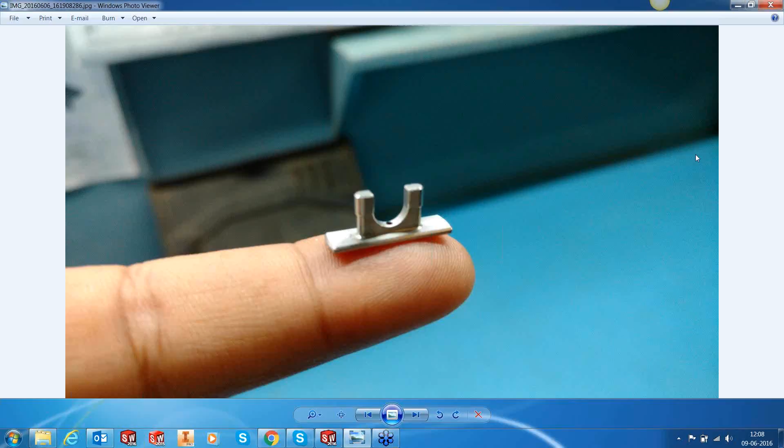This part, you can see it on my screen. It's held on my fingertip. Okay, and this is the size of the part. It was 20 by 10 by 12. It's a pretty small part. And the kind of tool life that they were expecting was more than what they're getting.

And after a couple of iterations, we learned a lot of lessons in this cutting, because it was new material for us. And the biggest lesson that we learned on this particular part was not to use turbo on Inconel material, especially 625, because although turbo used to give us nice cutting, our tool life used to dramatically go down. So we moved away from turbo.

And with our current strategies, mixing iMachining with HSM and a bit of 2.5D, we could push the tool life of the 10-diameter end mill from their existing 30 parts to about 60 parts. And the 4-diameter ball nose was doing very little for them, they were getting 200. In our case, the center slot was completely roughed out in iMachining using a 4 ball nose cutter. Again, a new lesson for me.

And what we achieved was about 400 plus parts on this, where the cycle time of the company was about 11.5 minutes, and we brought it down to about 5.5 minutes with iMachining, HSM, and 2.5D. But the majority of the role was played by iMachining in this case. And this is a big win for us in that territory, because it's already UG out there. We're very strong in this account.

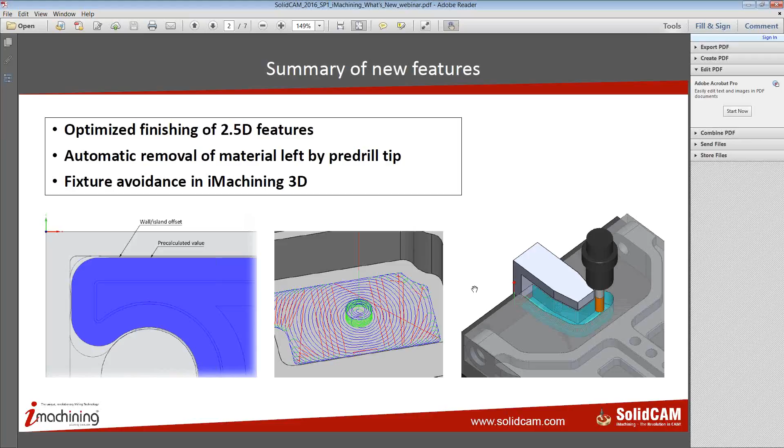Now, what you guys will notice right away as soon as you get into using iMachining 2.5D is we now have a new technology type called iRough and iFinish. And we've also updated our existing technology type of iFinish, which now also includes iRest if it needs to. Naturally, that's probably not clear right now, but once I get into showing this on the part, you'll understand better what we mean by that the iFinish also includes iRest.

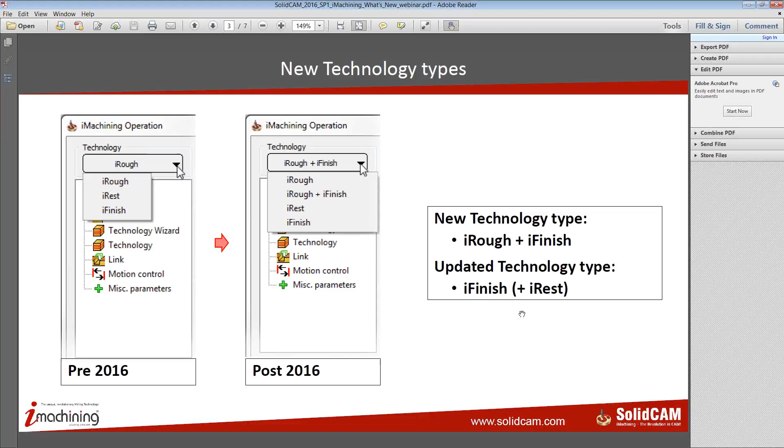To understand why we did all the finishing stuff for 2.5D, it helps to kind of understand the way people use the software today. And I think everybody here knows that usually customers and resellers were using some combination of iMachining, pocketing, and profile to optimally rough and finish 2D pockets. This can lead to many operations. This can also lead to the user having to track their parameters between the operations.

So with that said, I don't like doing too much in PowerPoint. Just wanted to set up a few ideas here. We're going to jump right into SolidCAM and SolidWorks. So the first thing I just want to mention real quick is the existing style we use today, because I think this sets the stage for what we're doing today and what I'm going to show you next. So if we have a pocket.

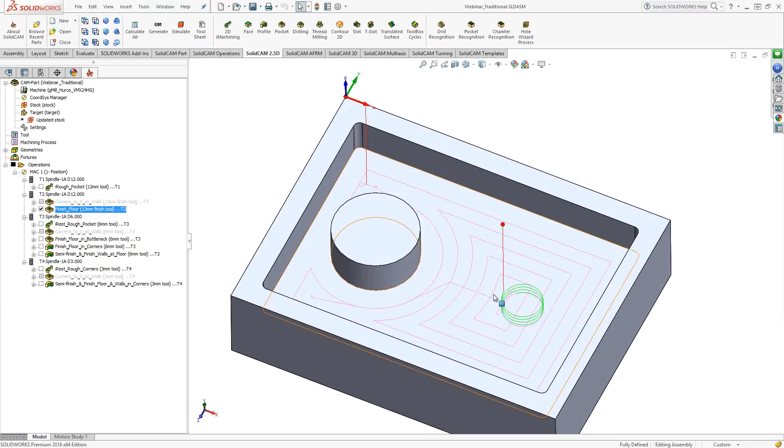Normally we're going to have some, as I said, combination of iMachining for roughing the pocket. We could finish with iMachining on the floor, or we could go to a pocketing style toolpath to finish the floor. And this is something we see a lot of people do, to get this more traditional looking finish on the part, as opposed to the iMachining spiral look that you get on the bottom of the part. Then you might have some rest machining to cut in between areas that the larger tool didn't finish.

You might have some finishing of the floors in those areas, or maybe you use a smaller tool to finish the floor for the entire thing. And this is always left up to the customer how he wants to do this and what tools he wants to use. You might end up finishing the corners. Some customers could use iFinish to finish the corners and to finish the walls. A customer could use something like pre-drilling to drill out the corners for finishing the wall. Or somebody might just end up doing lots of Z-level cutting in a profile operation to finish the wall.

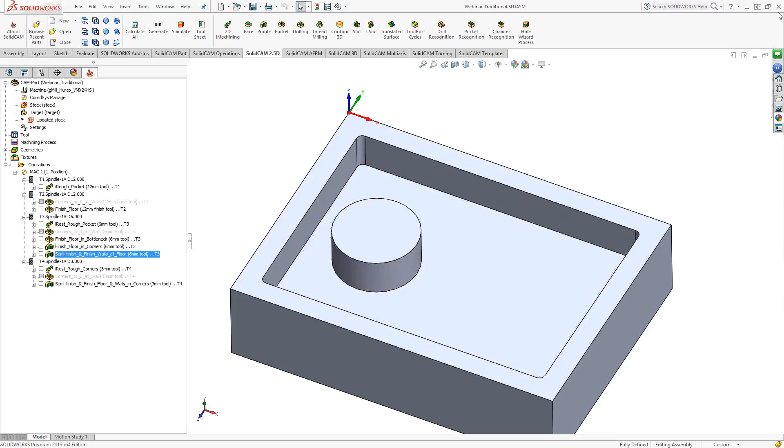So there is no right and wrong way for a customer to use these tools. SolidCAM is a toolbox. It's meant for them to figure out the right way. So in the end, the customer is trying to find the best optimization of operations, tool diameters, what tools he roughs with, what tools he finishes with, and he's always trying to make those decisions how he wants to cut the part using our multiple strategies. Now, I'll close this part, and let's get into actually seeing what we've done in iMachining.

So I have a part here. Basically what we got here is a 2.5D part. It's kind of modeled after an aerospace bracket. We have something we can cut around the outside. We have some semi-open pockets and faces, and we also have some closed pockets. So I'm going to go ahead and show how, with the new tools in 2016, you can use iMachining to do the roughing and the finishing of walls and floors, and how all that connection works.

So I have some previous operations in here. I'm going to leave them in there because I might unsuppress them at times just to show some things; we'll see how quickly things progress. So let's just say we want to start off with 2D iMachining, and naturally the first thing we want to do is cut the outside of the part. So we'll go to 2D iMachining. As I mentioned in the slide, we now have an iRough and iFinish in the technology type.

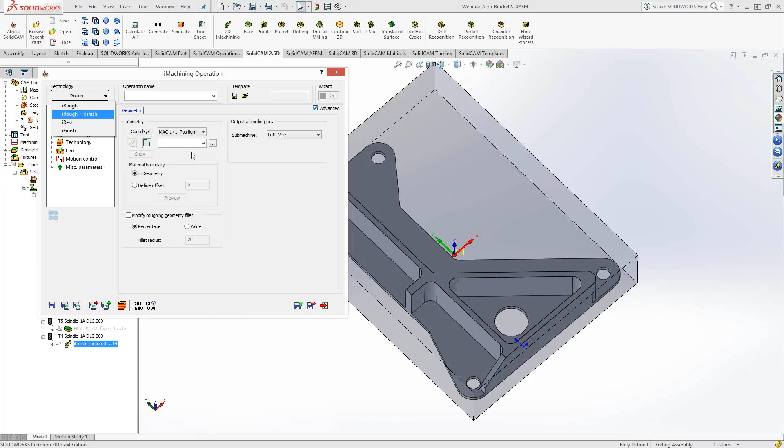And what I want to do is rough and finish the outside of the part. So with one tool, I want to be able to rough and finish the outside of the part, and then move on to my inside pockets. So what we'll do here is we'll define our geometry. So we pick the outside stock.

I apologize, didn't want to do that. Let me pick the bottom. So we have our 2 chains. We want to mark the first chain as open.

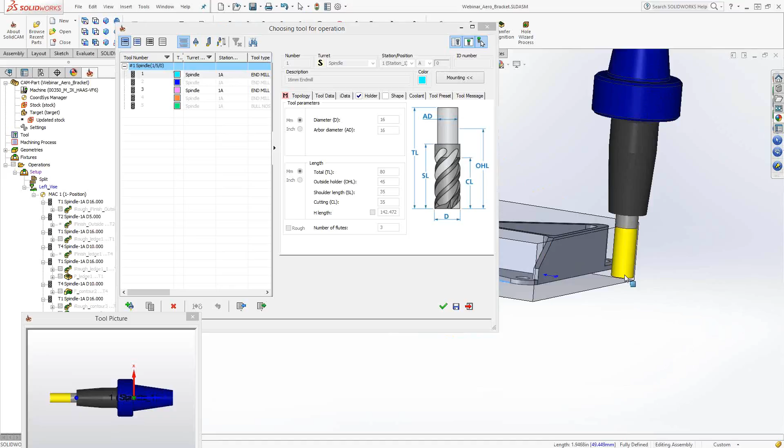Now we want to go grab our end mill. So what I'm going to use is a 16mm end mill. This tool is big enough to get all the way down through the part, but it is not going to be big enough to finish a couple of the small corners we have in there. But still, we want this big tool to finish as much of the outside as possible, and we only want to use a small tool just to finish the corners.

So we'll select this end mill. We'll select our levels. So we want to machine from the top. We want to machine down to the bottom. Let's say we want to go down 0.5 millimeter extra.

And now, if you look, there's not too many dialog changes that you're going to notice here, which is actually really cool. The software doesn't add too much in the UI, but there's a lot of stuff going on in the background. So we have our standard wall and floor offset. In this case, I'm not going to finish the floor because we're cutting the outside of the part.

Now, even though we're cutting the outside of the part, it's always possible maybe that's like a fixture, and when you flip the part over, you're going to locate on it. So maybe sometimes you finish the floor if you like. But we're just going to go to 0 on the floor offset because we don't have to worry about finishing the floor. We also now have a semi-finish. There's no point in having the semi-finish.

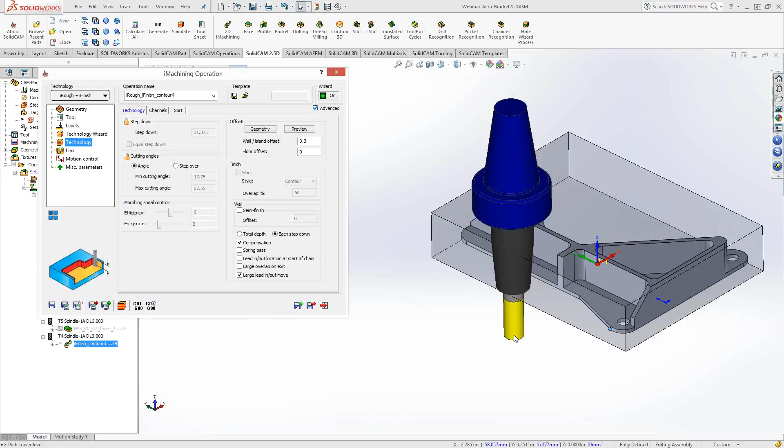And I'll pick compensation, and I'll pick a large lead-in, lead-out move, just so when we look at the toolpath, you'll be able to see where the final wall passes. And we'll just save and calculate this operation.

So here we can see we have the iMachining toolpath. It roughed out. And with our large lead-in and lead-out, you can see we also get the finishing toolpath around the wall. So if we actually simulate this, now that we've actually cut the stock, there's no point to see that anymore in SolidWorks, so it'll make the simulation a little nicer. Turn on the holder.

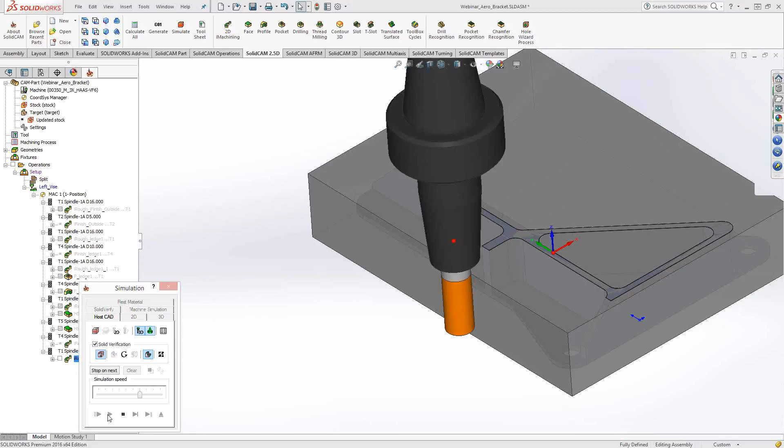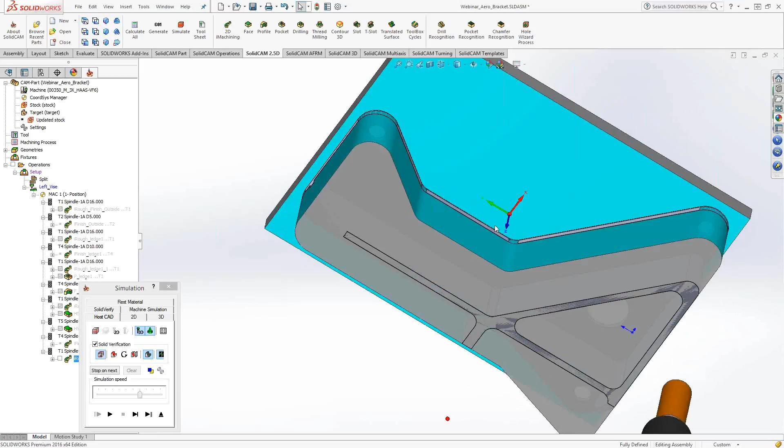So we get the iMachining roughing. It roughs to the wall offset. We get our typical iFinish where it cleans out the corners first, and then it does our final finish pass along the wall. And what we have right now is some material left over in just these 3 corners. But we've already finished the majority of the wall with this large tool.

For anybody who used iFinish in 2015 and previous, you would know that you could do iFinish. It was an existing technology type, and you could finish the wall with iMachining. One thing you could not do is finish the wall with one tool and then go and do rest finishing in the corners with a smaller tool. So now we've eliminated that limitation: we allow and calculate rest material for iFinish, so you can come in with a smaller tool, which is what I'm going to do here.

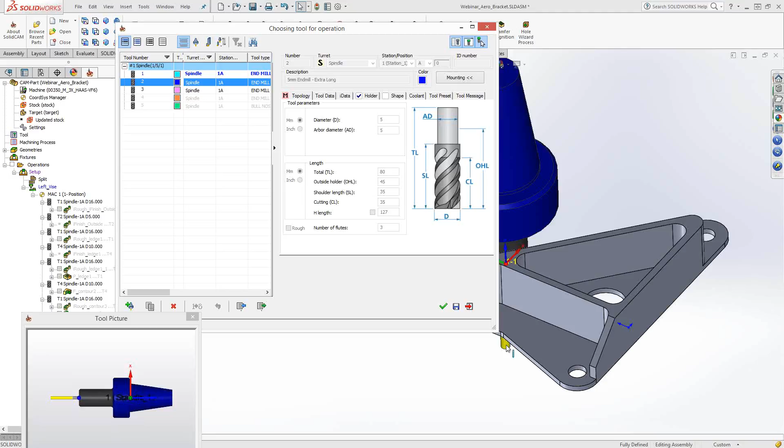So I'm just going to do a save and copy. I'm going to go select my smaller tool. So here we have our 5mm tool. The 5mm tool is long enough to get all the way down there. We will select that. Now what you'll notice is the technology type also auto switched to iFinish. That's because the operation it's linked against was iRough plus iFinish, so the only thing you can do now is iFinish again.

So we've also added some little UI things that auto select stuff to make the software a bit more intuitive and make things a little quicker to program. So here, with a small tool, a semi-finish can really be a nice thing. With semi-finish, we'll also get an extra toolpath, because we're going from 150 microns, then we can take a second pass at 80.

So if we calculate and simulate this, now you can see we have just iFinish toolpath in just those areas. And we'll quickly simulate this.

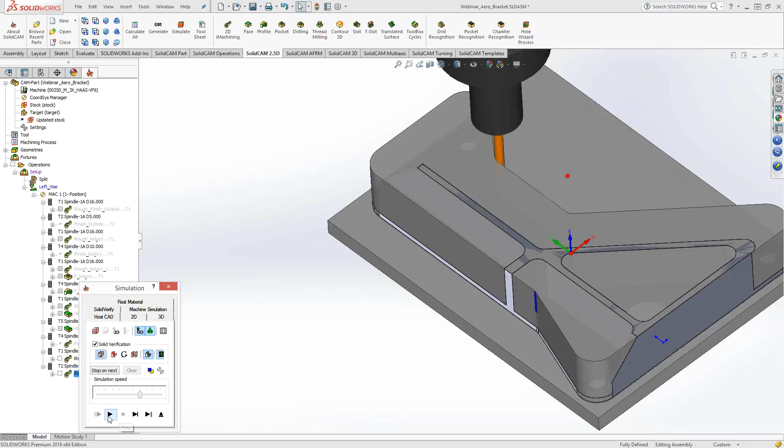This outside is pretty simple. When we get into the semi-open pocket, I'm going to go over more of each part of the toolpath that we're doing with the roughing and everything. So we'll finish this. So now we have our corner finished, and this is, as I said, a new feature now in 2016 that you can now finish after an existing tool with a smaller tool.

And what you've also noticed is that with the iRough, you can now do roughing and finishing in the same operation. So in the previous version, you would have to do iRough and then iFinish, but now we've combined those two tools into one technology type.

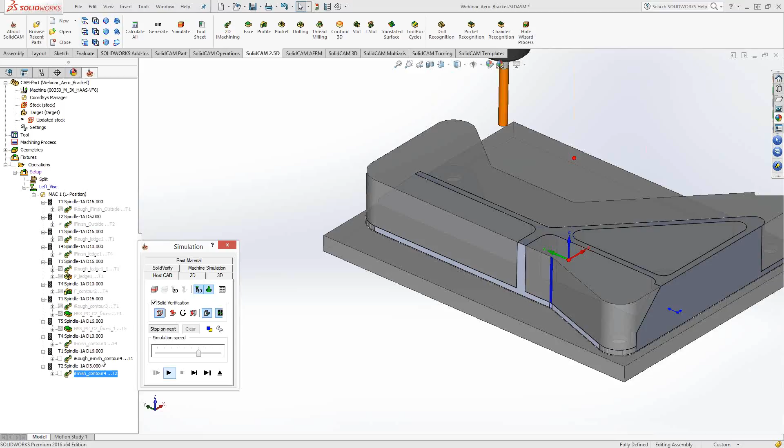Okay, so now let's do some of the more exciting things and actually see all the floor finishing and how that works. So we're going to add a new 2D iMachining. We are going to define our geometry. So there's our pocket. As we know, we need to mark our open edges. So we're going to do our from-to, so that way we get from this ledge to that edge, and we mark that as open. And I'll just call this ledge 1. I don't think I have that geometry named. Nope, of course I already had the same name.

Now what I do want to do is I'm going to do iRough and iFinish on this. So we're going to pick iRough plus iFinish. We are going to select our first 16mm tool. Oh, I apologize. We wanted to do iRough. So we're going to do iRough. We want to select our pocket depths. Okay, now when we do iRough, we are now going to finish the floor with a pocketing style toolpath.

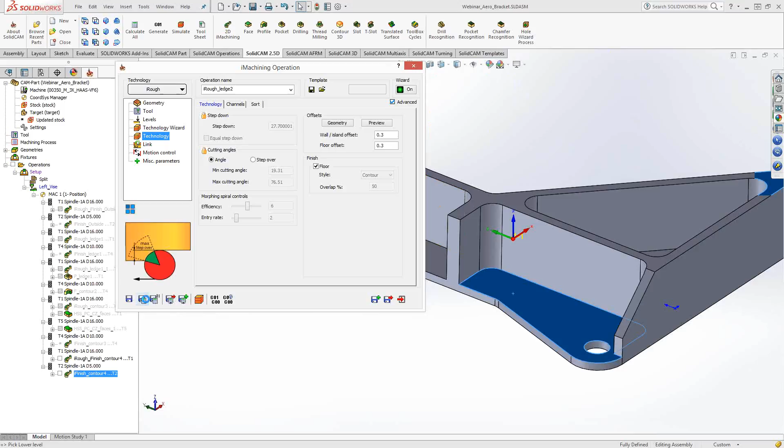So let's simulate this operation and see what we get. I'm going to rotate this to more of an isometric from this side. So we are going to get the iRough, and I'm simulating this slow so we can properly see what's going on. So we get the iRough. The iRough is staying away from the wall by the wall offset amount. Then once the iRough is done, we are now going to finish the floor with this tool. So now you can see we automatically get the tool leading out in air. And I will just single step this. And now we get the finishing of the floor.

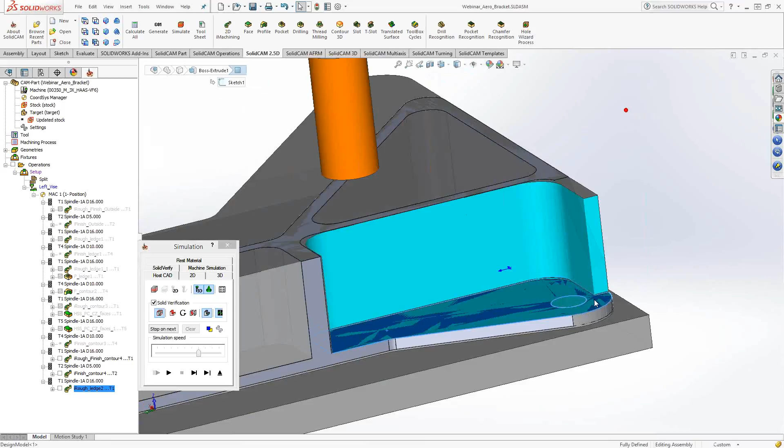Now I want to show some little features of what we're doing. If we zoom in here on this corner, since we are now tracking what is being roughed and what is being finished from iMachining, we can make some smart decisions about how to lead in and lead out in the air, and also to keep the tool from hitting existing material. So what you see here is, this little ledge is showing that when we finish the floor, we know the wall's not finished, we know the wall's roughed. So we stay away from the wall a little bit, so that way the tool is not actually hitting material along the entire flute.

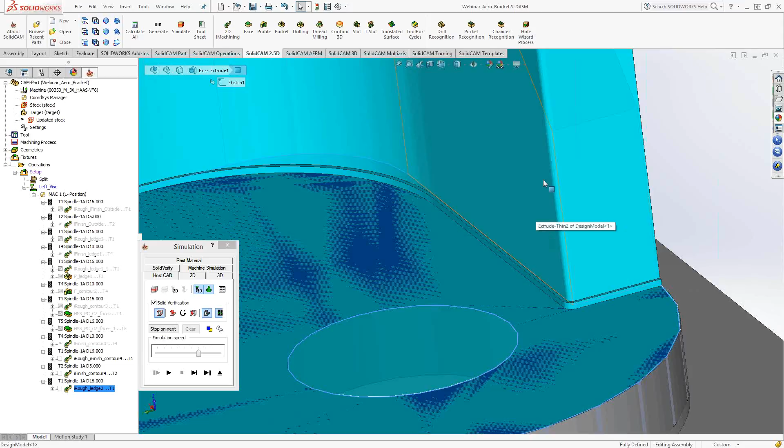So as we know from finishing, the best way to get the best finish is to keep the load as low as possible. So the last thing we want is, we don't want the tool to get excess loaded, like going into a corner or rubbing against the wall, because the tool ends up flexing a little bit, and when it flexes, the tool digs into the floor.

And I can tell you that we've done a lot of test cutting with all this finishing stuff, and a lot of these little things we did was a result of, one, what we knew from being machinists, and two, what we saw from test cutting. So I mean, we cut steels, we cut titaniums, we cut aluminum, we did many different size tools. So a lot of these little things we did is from our test cutting and trying to prove out what was the best way to do these things.

So we see now, we got an iRough, and we can finish the floor with a pocket style. You can still finish the floor with an iMachining style if you like. So let's save and copy this operation. And now we're going to do iFinish. So we're going to switch to iFinish. We will switch to our secondary tool. So our secondary tool we have is a 10mm end mill.

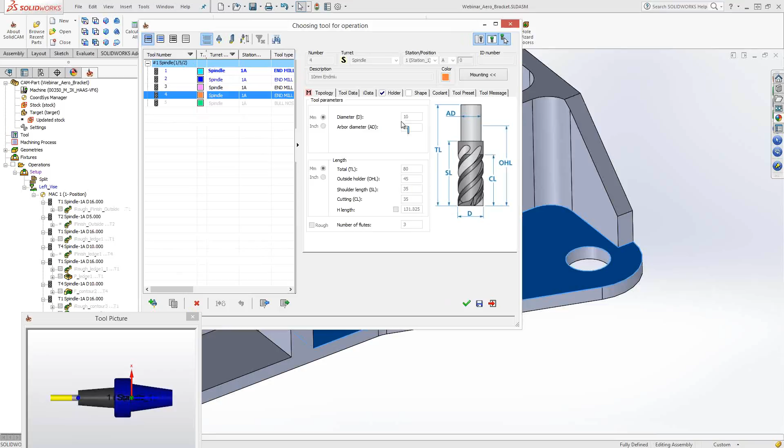So this end mill is a little bit smaller, but it's able to finish the corners. So we will select that. Levels, everything stays the same. The operation is linked to the previous one. This is a pretty big tool, so we don't need our semi-finish. We will do compensation and our large lead in/out move, so we can see that again. And we'll calculate this toolpath.

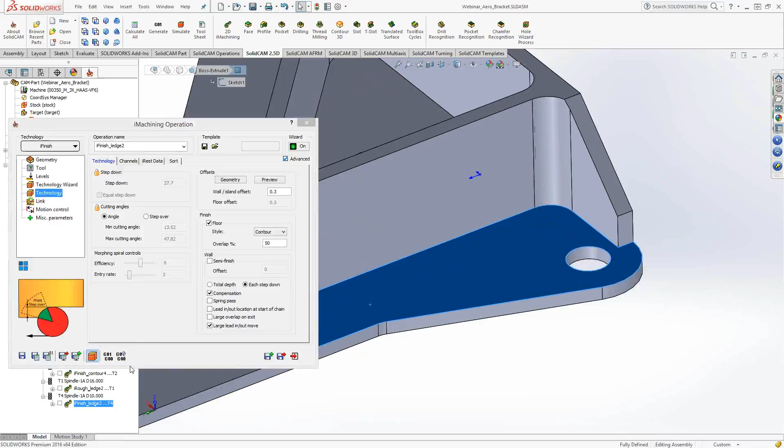So let's actually go into the simulation and see what's going on now, because now this operation knows that the previous operation did roughing, it knows the previous operation finished the floor, and it knows the wall offsets, the floor offsets, it knows everything that the previous operation did. So what we're going to see now is a very optimized tool path that keeps the tool from plunging on material and being very optimized.

So what we're going to get is our traditional cleaning out of the corners. So I'm trying to single step this stuff so it comes through nicely in the webinar. So if I zoom in on this area, you can see there was a lot of material left over from the large geometry fillet and from the iRough. So the corner is now brought in to the constant wall offset.

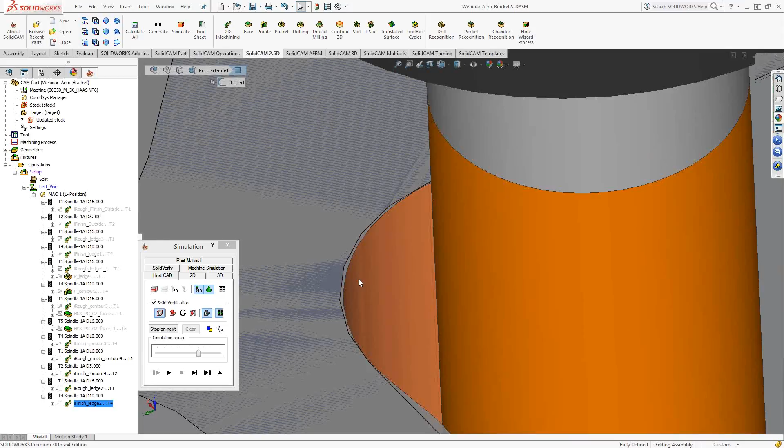Then we get our iFinish preparation, which is where the tool goes all the way. It basically finishes to the floor, to the wall, but it stays away just a little bit. And for anybody who's used iFinish, this is how iFinish always worked. We always had those little corner tool paths where any area where the tool would over engage on the finish wall pass, we clean those areas out basically to almost a zero wall offset, so that way the tool doesn't over engage. So we get this in both corners.

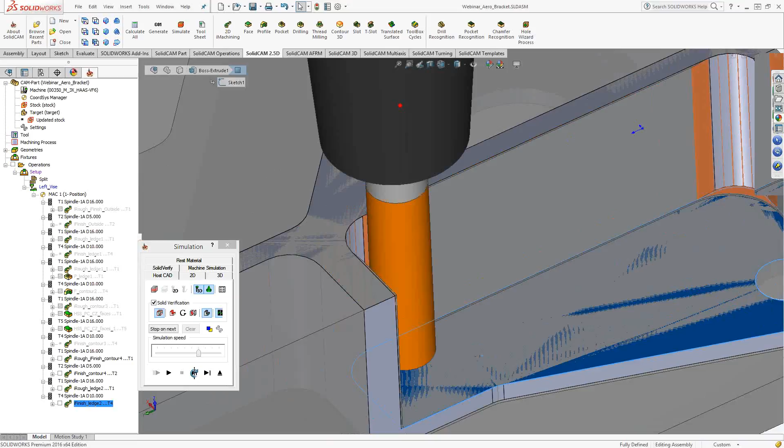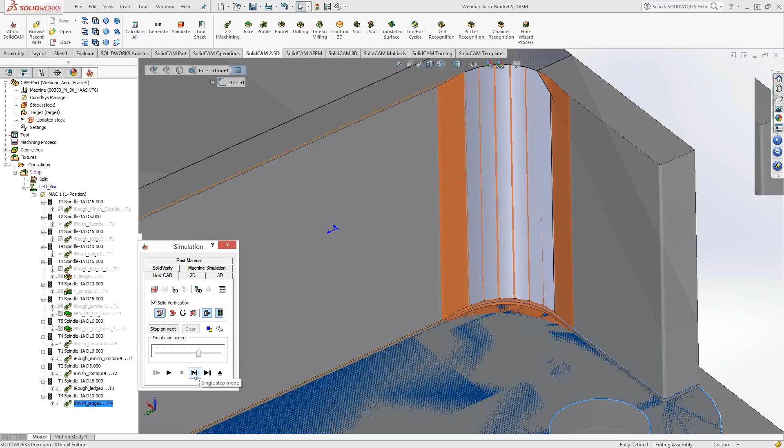And now what we are going to get, and we'll let the first one play because this should be doing the floor. And what I'll do is I'll actually turn off the tool for a moment, and we'll zoom in. So you'll see the orange cutting here down at the bottom. So here's what the tool's cutting. So we have the corner basically finished, and we have it prepped. Now we need to clean out the floor excess material. So you get now the floor brought in, and let me turn the tool back on.

You are going to get now the tool also going all the way to 0. So the wall gets cleaned all the way to 0. Then we get our final finish pass along the wall.

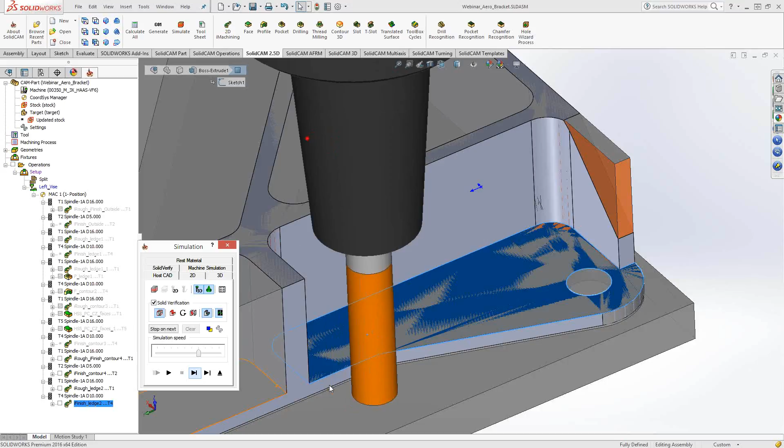Now, what we've seen is that you can now iRough. You can finish the floor with an iMachining style toolpath or a pocket style toolpath. When you do save and copy and you make a link, the iFinish knows if the floor was finished, if the wall was finished, and now we're correctly adding all the little toolpaths we need to make sure that the finishing can be done in one Z step. That's always the big thing with iMachining finishing from iFinish, we want to do one Z step. So we need to prep the corners, we need to clean out the rest material, and we also need to finish the floor.

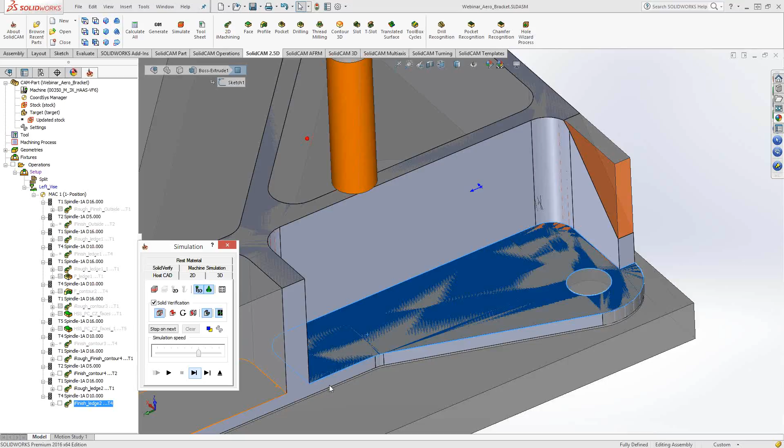As we mentioned before, one of the main things to make sure that we handle properly is that when the tool is cutting the wall and finishing, it's only touching the wall. And when it's finishing the floor, it's only touching the floor. We don't want to end up in a condition in iMachining where we want to be finishing the wall and it's cutting excess material on the bottom from the floor offset, and therefore adding some extra load and possibly digging in on the floor. So these are all little things we're doing in the background to make sure you get the perfect tool path.

Now let's look at how we would program that ledge using our existing tools. So I'm just going to suppress these two operations, and let's say we can take the iRough, because the way everybody would work today, we would use an iRough. But let's say we wouldn't finish the floor with the iMachining. So we would just do an iRoughing toolpath. This would clean all the material away, leaving our 0.3 on the floor and our 0.3 on the wall.

Then we would go to something like a pocketing operation. So let's go into pocketing. We would try and share geometry because we can. So this is our ledge 2. We will go select the same tool. So we'll go use that same end mill that we were using.

Now, since we've already roughed the entire pocket, when we finish the floor, we don't want to start from the very top and go all the way down. So what we're going to do is set our upper level and our pocket depth to basically the bottom. And we're going to tell SolidCAM that we have the 0.3 worth of material on the floor, because that's actually where the material is stopping.

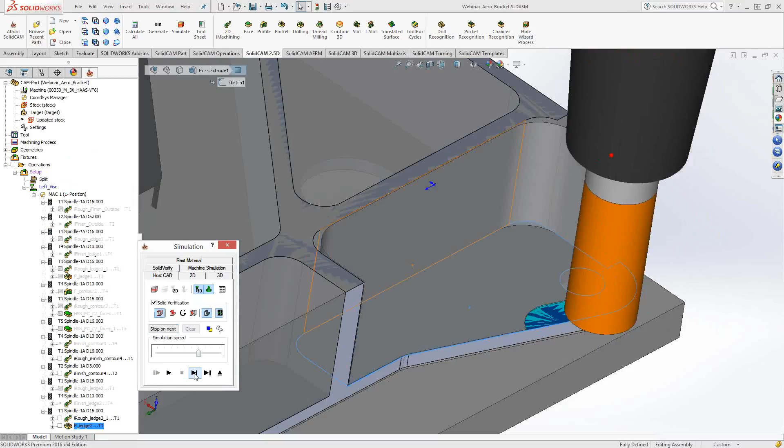So let's simulate this. As you can see, the pocketing toolpath is going to be basically what we saw in the iMachining. Okay. We finished the floor, but we noticed something. The tool touched material in the corner. So one thing we get in mixed operations is that iMachining uses things like geometry fillet, and the geometry is cut with a bigger corner fillet, so that way the tool cuts really nice with roughing. So when we go to pocketing, we have more material left over in the corner.

Well, naturally, we probably don't want the tool to hit in the corner. So now the user has to use some combination of his understanding of wall offsets and going further to stay away from the wall. And he's going to maybe put in here, I don't know, let's try like 0.75. Because the idea is that when we finish the floor, the last thing we want to have happen is for the tool to hit a bunch of material in the corner. Okay, it looks better, but you still need to go a little more.

Okay, so now we're going to get a nice tool path. It's going to stay away. And as I showed also with the iMachining toolpath, we get this ledge that's left over because, as we said, we don't want the tool touching the wall. And you can see how on the straight parts of the wall we have a different amount of material than on the floor, and on the corner.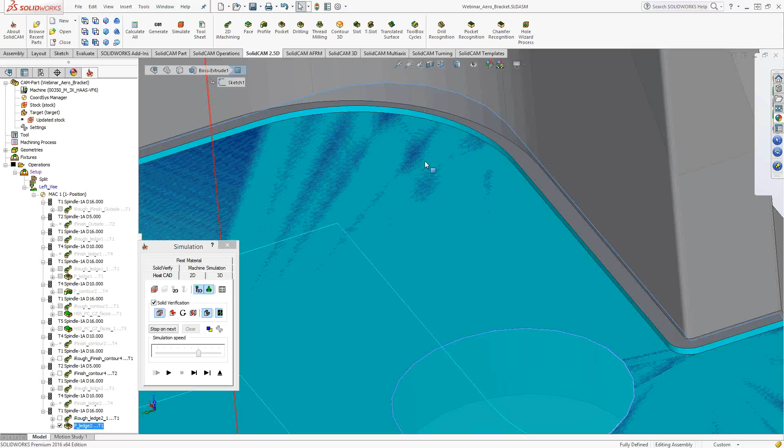Now, this toolpath is fine. This toolpath here is no less optimized than what we have in iMachining in 2016. The only difference here is we are taking care of all the offsets and everything automatically because the iMachining toolpath knows what was cut. It knows all the geometry and it's shared. So this is no shorter or longer of a toolpath. It's easier for the customer to use. It's easier to get an optimized toolpath, and you don't have to play around with some of the settings and remembering stuff.

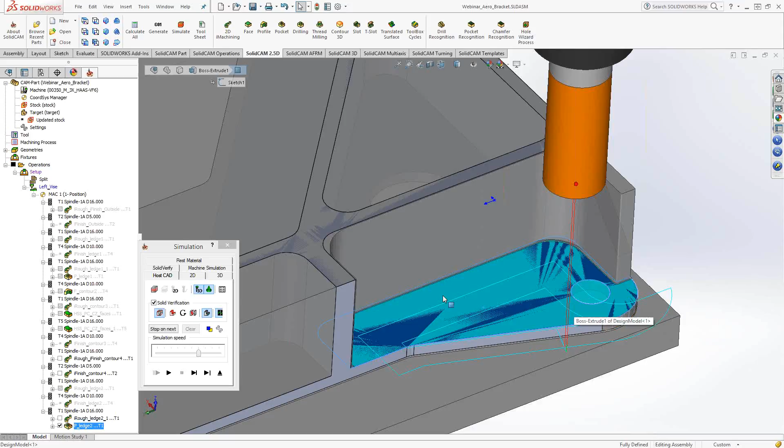And then, of course, probably from here, we could throw in a profiling operation if that's what we actually wanted to do. I think most people would probably use iFinish, but that's up to each person. But if we did a profile operation, let's go down to our 10mm tool. Levels. So once again, we need to pick our levels from this operation to this operation. We are going to finish. Let's say we want to do equal step downs, and we can finish with 4mm steps, and we can turn on compensation if we want. Let's calculate.

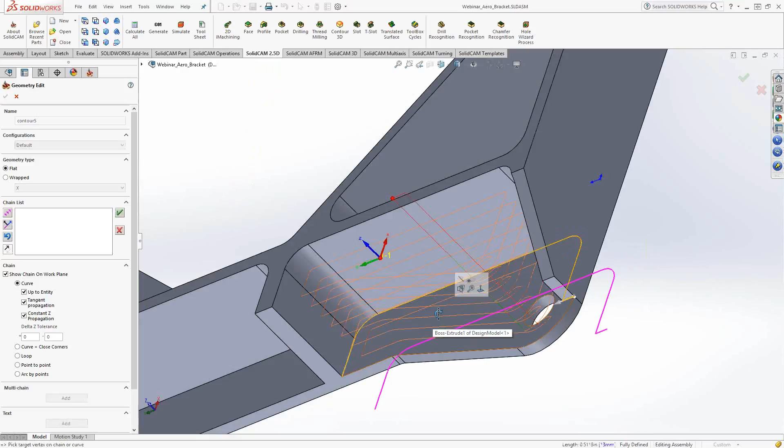Okay, first thing we do notice when you share geometry between pocketing operations and profiling operations, the chains that you pick are where you get the cutting at. So one thing I do have to do is on the semi-open pocket, I need to define its own geometry that just consists of the wall. So we're going to pick up to entity. We'll start here. We'll pick to there. Now we have just our nice profile geometry. Save and calculate. Okay, now that looks much better. Now we don't have that tool path along this wall here.

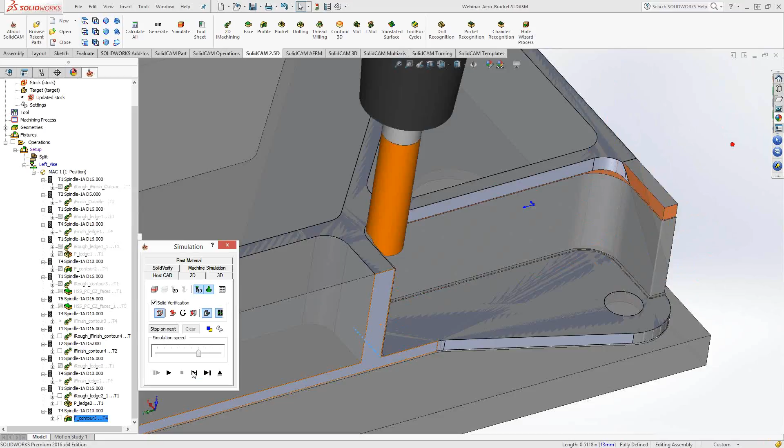If we go and do a simulation, and let me just turn off the wireframe. As we simulate this, going into profile, naturally on the straight line cuts, perfect. We got a nice tool path. The load is really nice. It's going to be no problem. When we come into the corner here, you can see we have that excess material where the tool is going to over-engage. It's going to probably do a little squeak like it normally does.

So I think a lot of people, when they do finishing of the wall, if they're not using iMachining iFinish in the previous version, what somebody would probably do with profile is they'd probably add like a roughing, and they'd probably leave something, as we said, for finishing, like, I don't know, 0.25 for finishing.

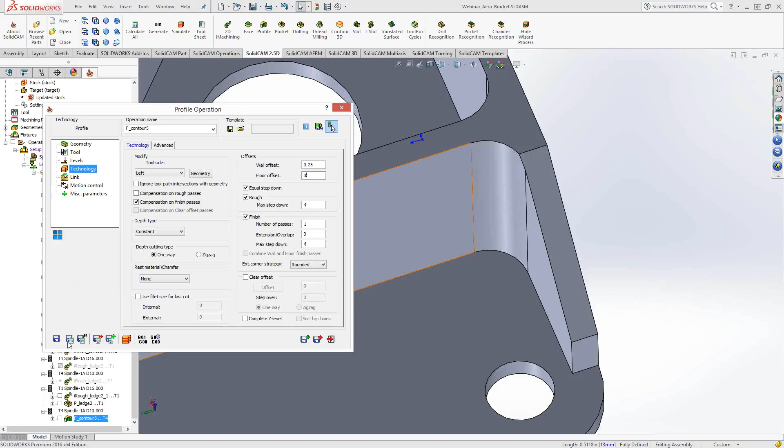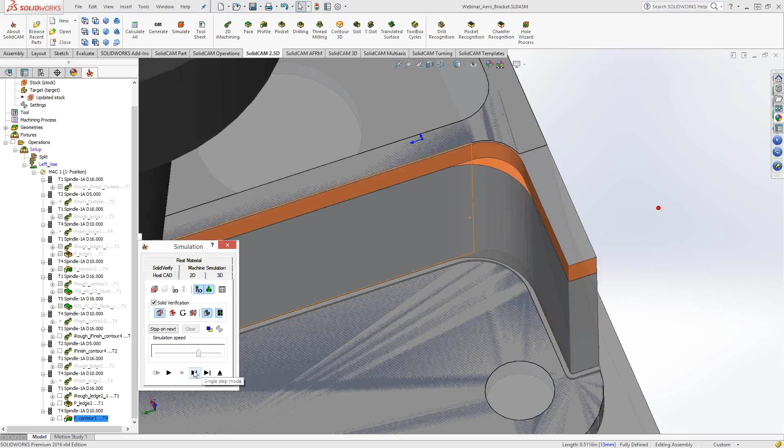And what this will do is this will actually give us two tool paths, kind of a semi-finish to get rid of the bulk of the material, and then the finish path. So okay, we get the first tool path. Yes, it's going to over-engage a little bit in the corner. People probably assume they're finishing, it's not such a big deal, or maybe they just slow down the whole feed rate and they deal with it.

So we get this semi-finish, and then we're doing this in multiple Z steps, which I think is traditional for people to use if they're not using iFinish. And then you get your finished wall.

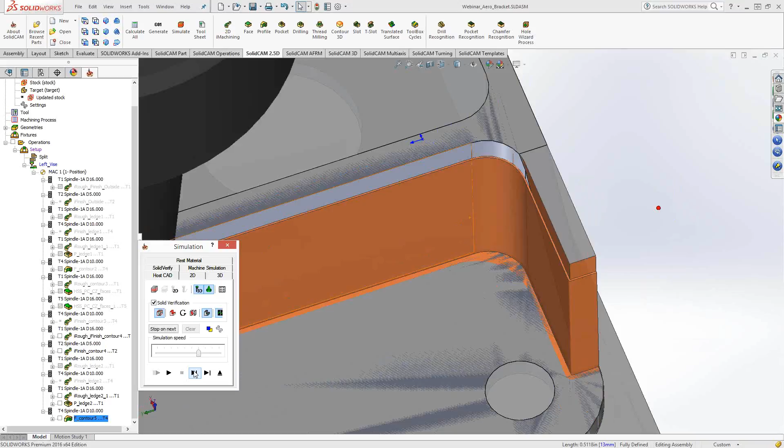So the point of showing all this is to give the understanding of, okay, you saw what we did with iMachining, where, I don't know if I like the term automatic, because it's not necessarily automatic, but the software is working with you as you're programming. It's understanding what you're cutting, and it's picking things in a smart way, so the customer doesn't have to keep track of it. And just like iMachining, everything's concerned about the load. So we care about the load even when it's finishing walls and finishing floors.

And I can also show you there's something special we also do in the helical entry to get a very nice finish on the floor, so you don't get the helical entry mark. So we're taking these same principles of iMachining roughing, which is constant load, best cutting, best tool life, shortest cycle time, and we're trying to apply those same goals and those same methods directly to the finishing, and that's what we're trying to show here.

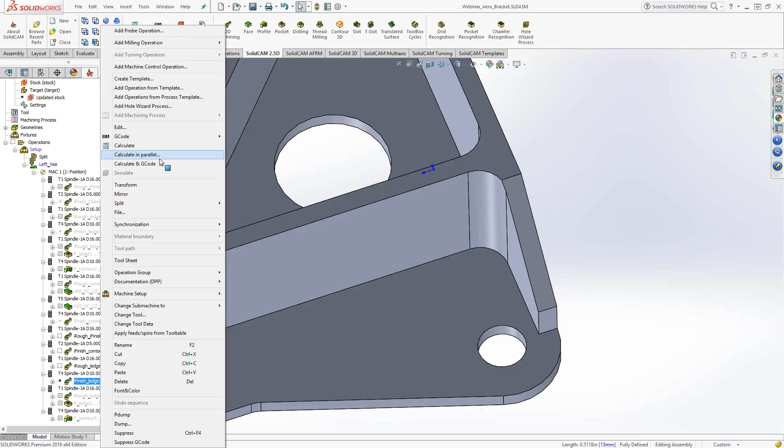Now I'm going to suppress those couple operations, and what I want to do is show something kind of cool here with the roughing and the finishing. So in the first example, we roughed the pocket and finished the floor with the big tool. Well, what happens if you didn't want to finish the floor with that bigger tool? What if the tool that actually finished the wall, you want to finish the floor? And what if you changed your mind in the middle of programming?

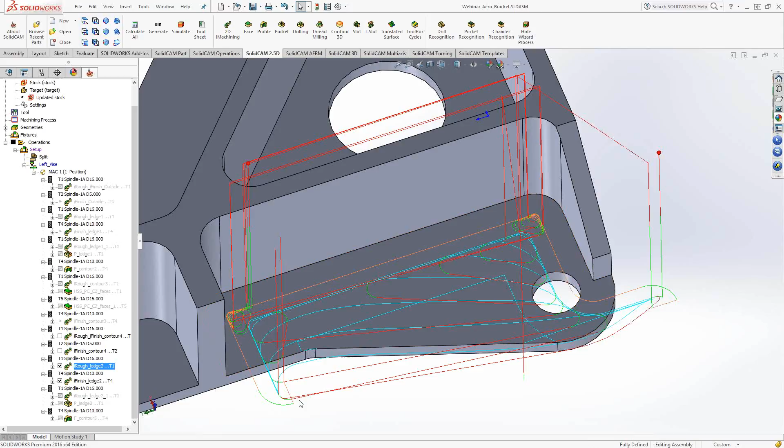What you're going to notice in iMachining, everything is linked. So if I go back to the first operation and I say, I don't want to finish the floor anymore, if I do save and calculate related operations, you will see that the iMachining toolpath just does the roughing, and now the iFinish toolpath, instead of just finishing the floor along the wall where the wall offset was, it now finishes the entire floor.

So let's simulate this, and let me turn off the toolpath display. Oh, I apologize, guys. So here is the roughing toolpath. This toolpath is not going to finish the floor. And then when the iFinish picks up, the iFinish is going to finish the entire floor.

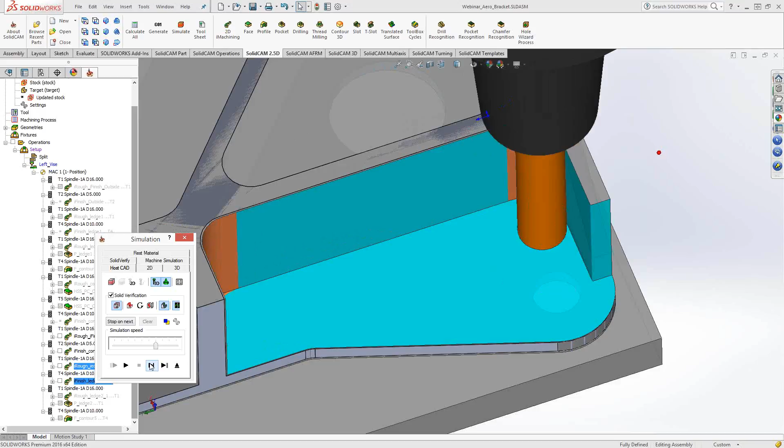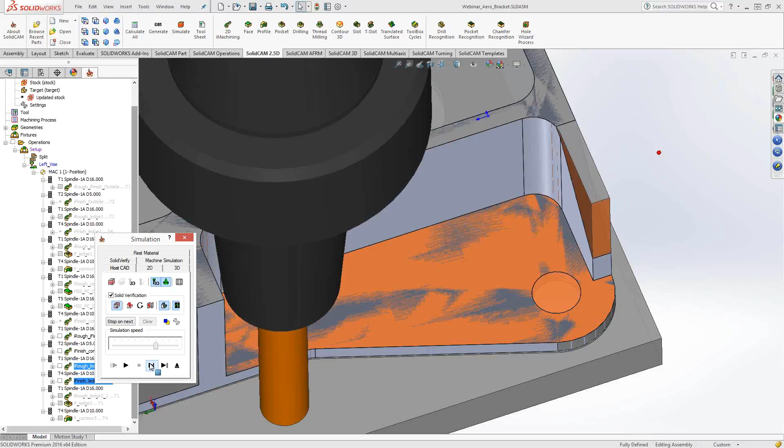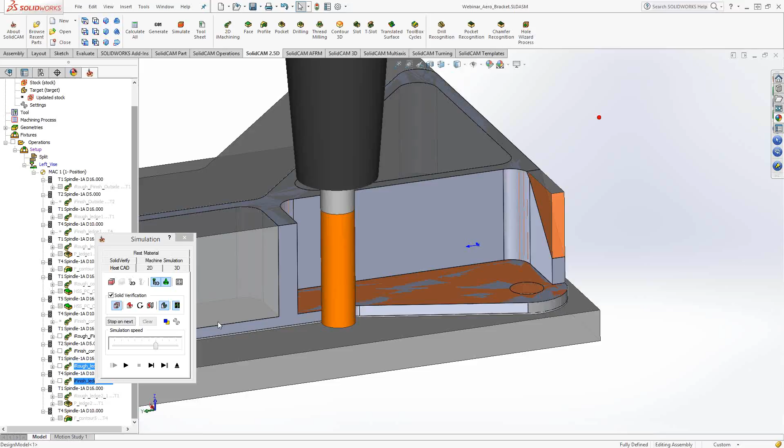So we get the prepping in the corner, then we are going to finish the entire floor, and then we do our final finish pass. So that's there to show you that we're tracking operation to operation what's being done. Are you finishing the floor? Are you finishing the wall? What's the tool diameter? We're tracking more things now than just the wall offsets and things like that, and we link it all together.

Now, what I'll do just to make this kind of nice, I'll show how you could program all the pockets. So that was to give a little deeper look into the little finer things we do. But the beauty of what we did is how quick it is to program. So let's say we did the roughing and the finishing on the outside. Now what's really nice is we can come in, we can say 2D iMachining. Let's say we want to cut all the pockets at one time.

So I'm going to go in one operation, pick this pocket, pick this pocket, pick this pocket, pick this pocket. So there's our 4 pockets. In the first chain, we need to mark our open edges, just like we did the first time. So we're going to use our from-to, and we're going to say from this to here. We're going to do the same thing on the second chain, mark open edges from here to here.

And of course, when you guys are demoing or showing customers, if you're not dealing with semi-open pockets, the chain selection looks even quicker because you don't have to do any of this marking open edges. So if you're dealing with a closed pocket example, just parts with pockets. And while I was talking, I forgot to click the from-to.

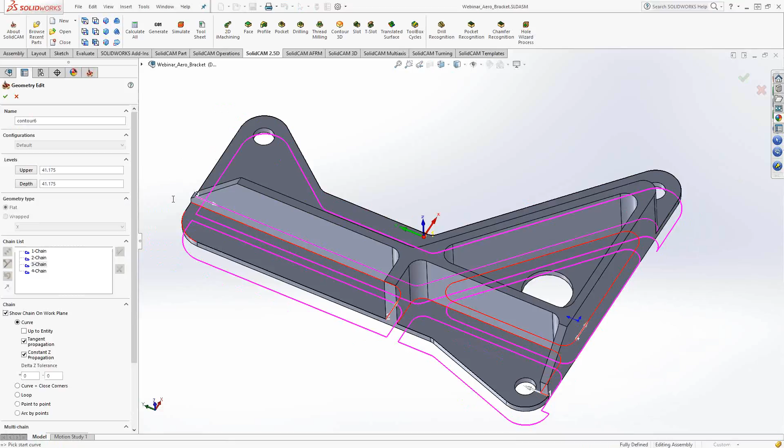So if you're dealing with closed pockets in your demo parts, you don't even have that extra step there. It's just going to go a lot quicker. So we are going to go pick our 16 millimeter end mill. We pick our levels from here to here. We want to finish the floor. We want to use contour. We're going to save and calculate.

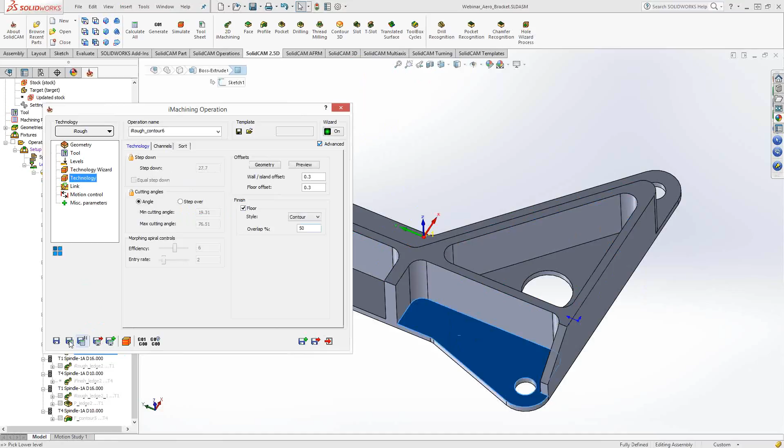This is going to get our main roughing toolpath, helical entry in one, open pocket for the open pockets. We can do our save and copy. And now we just want to change the tool. We want to go to our 10 millimeter. We want to go to iFinish, and we want to finish the floor, finish. We don't need the semi-finish, compensation, large lead in, lead out move.

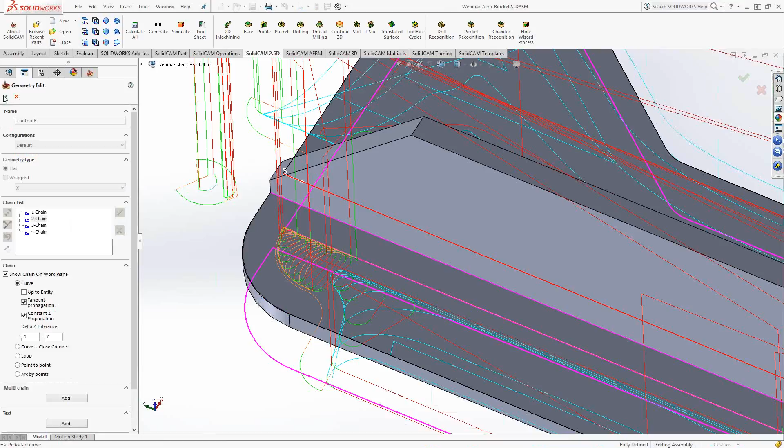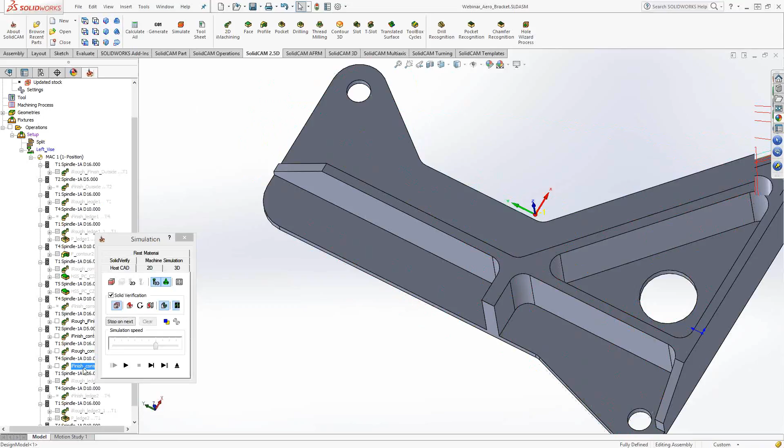And there we have... I must have missed. Of course, I missed in chain number 2. That ledge. And now we get the nice extension. So you get really a very quick software now to program with. And we'll just simulate everything at one time. You get the helical entry in the one pocket.

So this is not... I think a lot of us are always demoing against other softwares that try and show feature recognition and things like that in a fast way of programming. We hope that some of these new tools we have going on here allow you to show a quicker, faster, smarter way of programming. So we're not automatically finding the geometry, picking the tools, and automatically doing everything for you.

But what we are doing is we are automatically, with iMachining, picking all the feeds, the speeds, the lead-ins, the lead-outs, the engagement angles with the wizard. When you're doing the finishing and the mixed roughing and finishing, we're tracking everything. We track what was the wall offsets, how to plunge in air, what lead in and lead out to do. We're doing all these things now that the customer doesn't have to do.

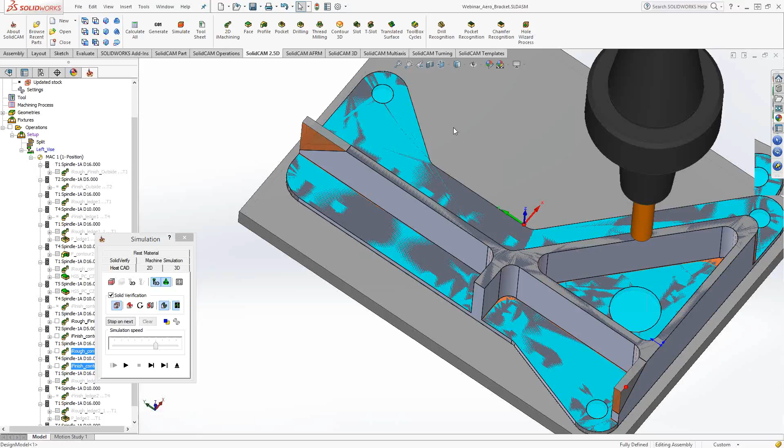And because it's iMachining, it's all optimized. I mean, really, we are optimizing this the best we can. By finishing full depth of cut on the wall, you're optimizing. You're saving cycle time. By just cleaning out the corners, you optimize. So all of these things we're doing are for optimizations.

One last thing I think I should show you guys is I mentioned in the slide that iFinish now includes iRest. So let's show what I mean by that. So if we go back to the toolpath that did this simple ledge, let's go in here and let's turn back on the finish floor. Now let's say for the wall offset we decided to leave a huge amount of material. So we're going to leave something like 8 millimeters worth of material.

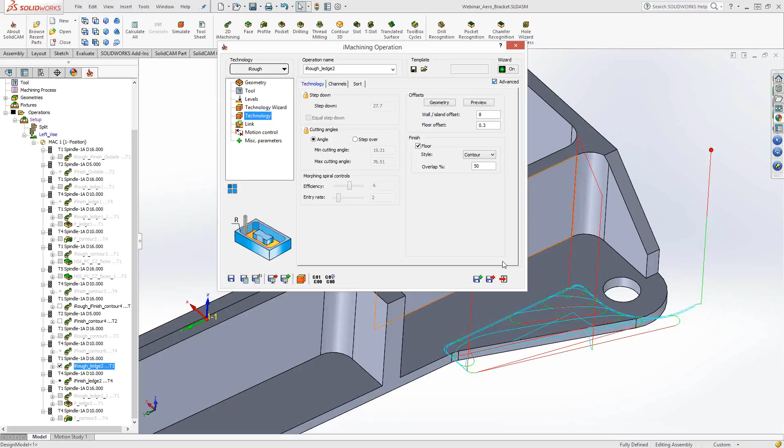And I'm not saying this 8 millimeters is something somebody would use out in the real world, but this is something to show what we're doing here. So now, if we simulate this toolpath, you're going to get the toolpath, and guess what? You're going to have 8 millimeters on the wall. So there's this huge chunk of material. Now we're going to go to iFinish, and we are going to calculate this toolpath.

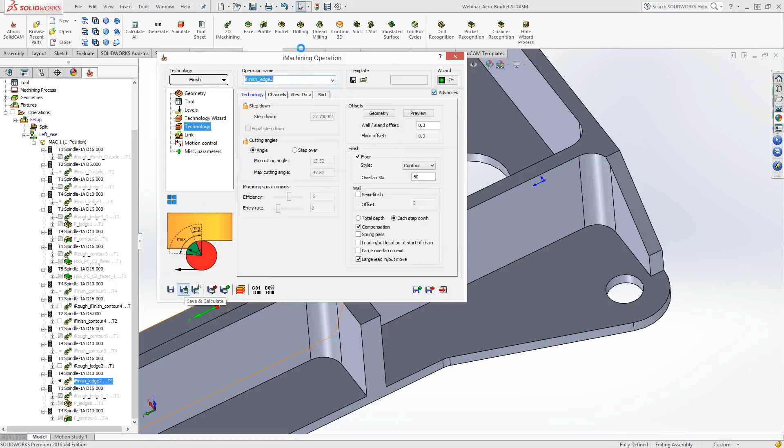In the current version, if you guys are using iFinish, what you would know is that if the previous material was larger than the final finish pass, you would get a message that said the previous wall offset was larger than the maximum step over, and you would have to add some iRest machining operation in there. Now we take care of that automatically. So now what you'll see, sorry, I started playing that a little quick.

Now you'll see that this iFinish operation knows that there was a lot of material left on the wall, and it will do a rest machining to bring the wall into the wall offset defined, because in this operation we have a wall offset of 0.3, because that's what we want to finish with. We want the finish pass to be taking 0.3 millimeters. So now we also add this second prepping operation. Besides prepping of the corners like we normally do, we also take care of the rest material.

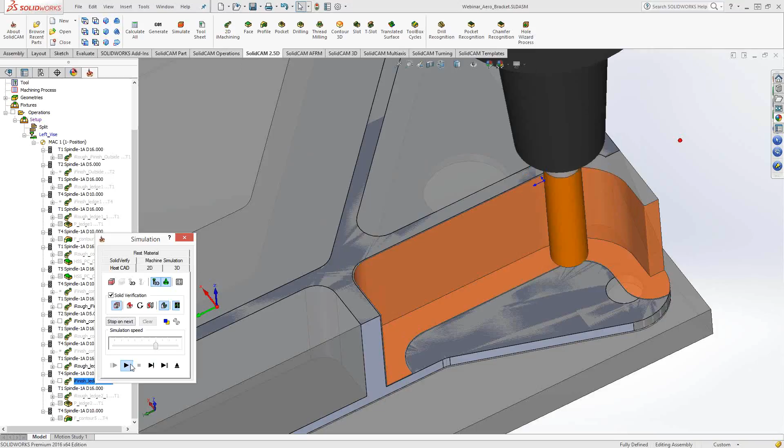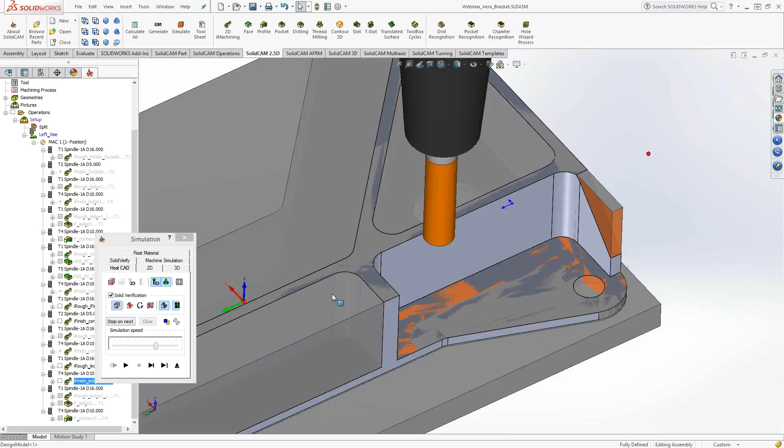So this is once again less operations. Shorter programming, easier to program. We've removed some limitations, we've enhanced some things. So this is some of the stuff we've done for finishing, and there's more things in here, and maybe what I should just mention real quick is the things that you'll see different in the operation, because it's not much.

When you do iFinish, you're going to see a finishing geometry fillet, because the roughing is always going to go with the roughing geometry fillet, and then you have a finishing geometry fillet. In the feed and speed section, we've always had spin rate, spin finish, which did the wall, and spin helical. Now you also get spin floor. So in this one operation, you have separate feed rates and spindle speeds for roughing, finishing walls, helical, and for

the floor. The iMachining wizard is calculating the finish feed rates and the finish RPM, but of course these a lot of times are left up to customer desires. So you can always come in here and change any of the feed rates or RPMs. If you want to override it and finish the floor at a faster feed rate, you can. Finish the wall at a faster feed rate. The customer can change them, even though the wizard is calculating them.

And then on the technology tab, we've always had the finish floor, but now you get a choice between contour and iMachining. If you pick iMachining, the overlap goes away because iMachining uses the engagement angles from the roughing. So if you have a part in something like Inconel, Ahmad was cutting the part in Inconel, even though you might like the look of a contour style on the floor, your tool life, even cutting that 0.3 millimeter on the floor, can get beat up using that traditional style pocketing toolpath. So you can still choose iMachining for finishing the floor, and in hard materials, I definitely think this is a useful feature to have.

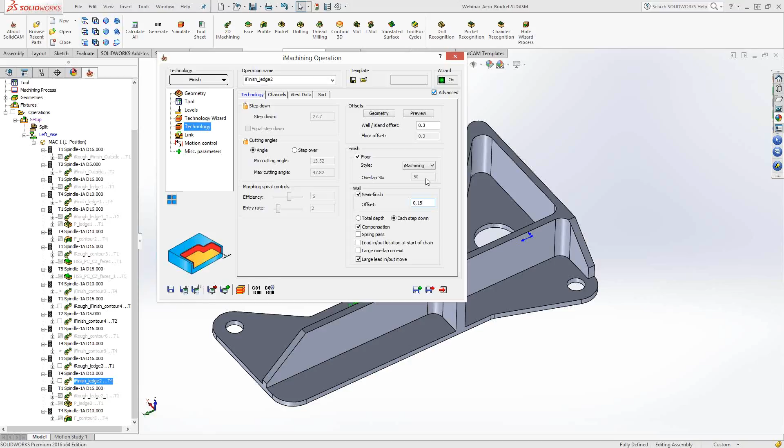So we can exit this, and let's go back to our slides real quick. Okay, precision machining. This is something I just talked about with semi-finish. One thing I think we see more in machining nowadays is that customers circle mill bored holes or tight tolerance holes. We heard from some customers and saw how they did tight tolerance features, and a lot of those customers use some combination of a semi-finish with a spring pass. So now also in iMachining 2D, for the most part, I don't think you would use a semi-finish, and I don't know that you would use a spring pass. But if you're trying to make something highly accurate, you have the combination of semi-finish and spring pass. You could use them both together, or just a spring pass or just a semi-finish.

We've put some thought into this from what customers have said, that they should be able to machine something precision also with the finishing tools in iMachining. Still not as powerful as profile, and I think that's important that everybody realizes. The stuff we've added to iMachining is to do maybe 80-20, 80% of the work. The customers still need pocket and profile. There are so many more options in pocket and profile when it comes to controlling the toolpath and multiple passes and things like that.

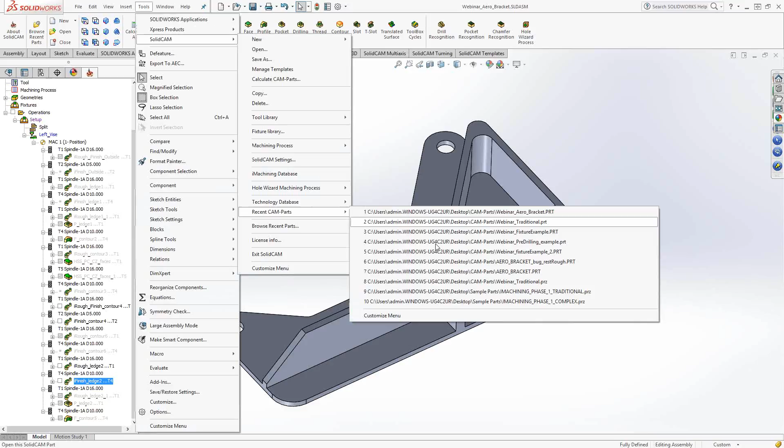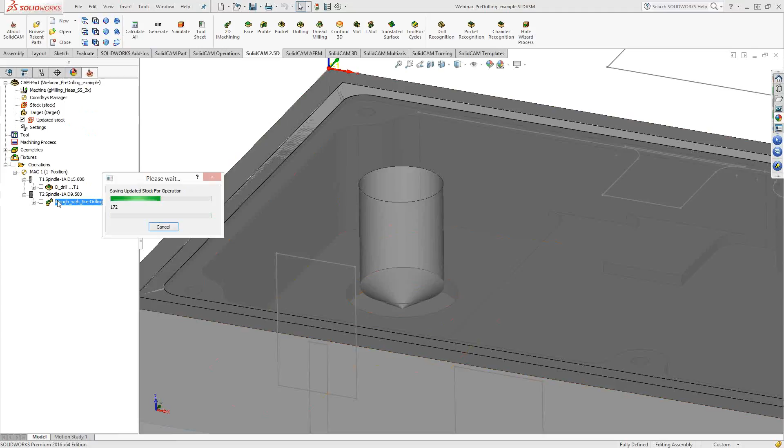And let's show the updated stock. Cool new feature in 2016. I love this feature. So we're machining this pocket here, and we have a pre-drill. And what we can see is that part of the tip of the pre-drill is sitting above the bottom of the pocket. Now, when you pick pre-drilling in SolidCAM, and I'm going to turn off the updated stock.

Let me open up this operation. I think everybody knows about pre-drilling in iMachining, but previously in pre-drilling in iMachining, we knew the tool diameter, we knew the X, and we knew the Y location. Now, we don't display it in the UI, but I think this is something we will do. We now track the Z bottom of the drill, and we also track the cone. So we know the 3D tool, and we track it.

So in this instance, part of the tip is below the pocket, and part of the tip is still up above it. You are going to get an iMachining helical entry that machines out the tip. And if we simulate this, you'll see we'll go down to the bottom of the pocket. We'll do our helical just to clean out the tip, and then you get your iMachining toolpath. So the thing here to see is that we are tracking the drill.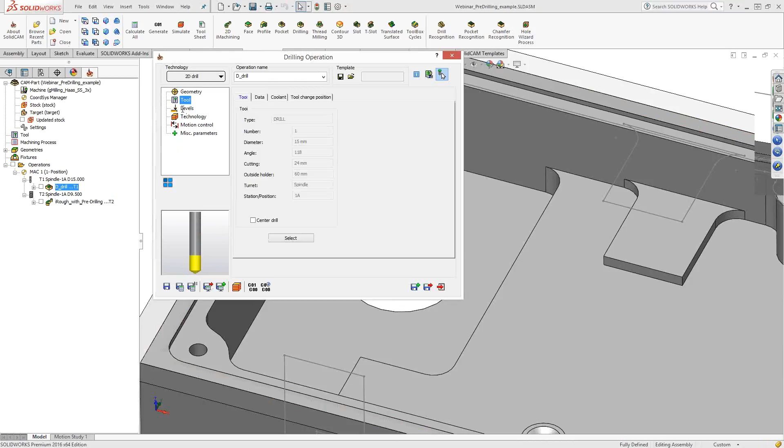Now let's go into the drilling operation. We have the bottom of the pocket, which is 21 millimeters, but we had cutter tip and we were using a delta. Now we're going to go full diameter, and I think this is what most people would do. They would pick the bottom, and they would say, okay, I want to go 1 millimeter past, and I want the full diameter. So we're going to calculate that. We'll calculate the iMachining toolpath.

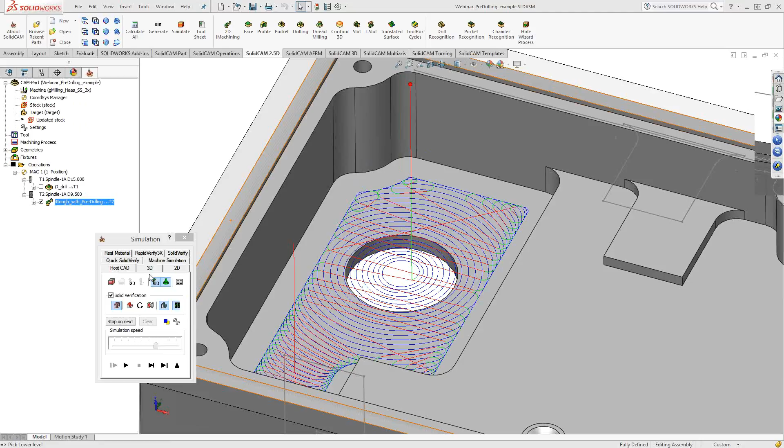And now you'll see the iMachining toolpath no longer does the helical entry, because if we simulate this, the tool can plunge all the way to the material, all the way to the bottom, without plunging on the tip. So no UI change. This is not something you're going to see. There's no extra UI. There's no extra settings.

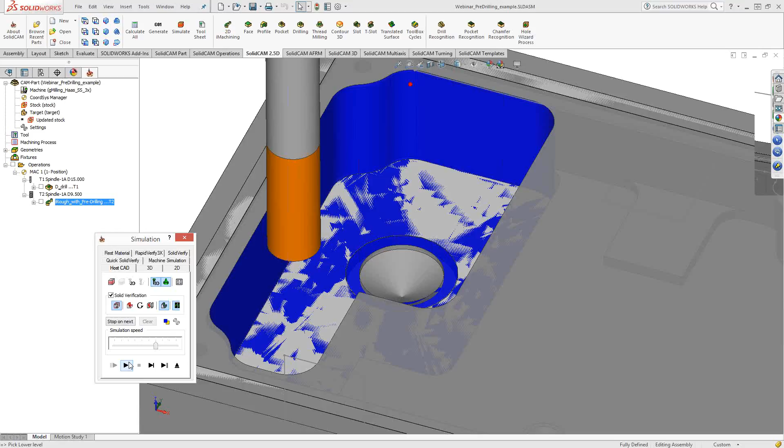Just now we've updated the pre-drilling to know about the previous drill, know about the tip, know about the angle of the tool. If the tool also has a flat, we track all that, and we see if any of the tip is left over in the iMachining pocket. And if it is, we do just the helical entry just to clean out just that area. So really not too much going on, not too much to see there, but I can say that this was a pretty highly requested feature from people who use pre-drilling.

And then the last feature we'll go over is fixture collision protection in iMachining 3D. And this one is really cool because I think everybody has always wanted fixture avoidance inside of SolidCAM. So now in your setup, of course, if you have your fixture, we can now use it in iMachining. So in iMachining 3D, what you're going to have on the geometry page is this fixture collision protection, and you're going to get a clearance.

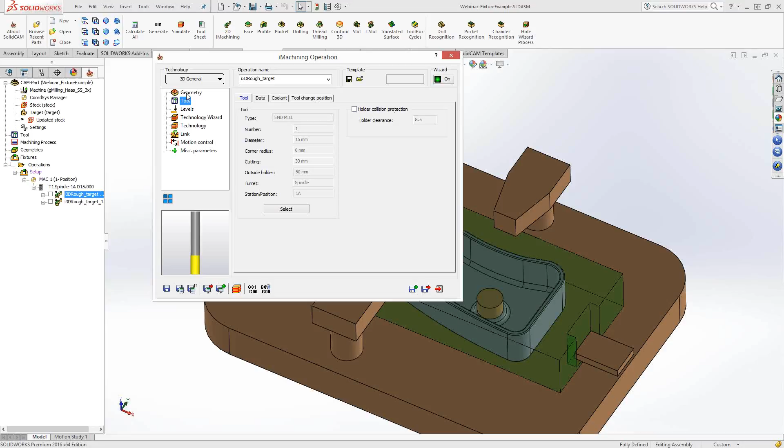Now, this is also working in tandem with the holder collision protection. So, you protect against the holder, and you can also protect against the fixture. In this example, I don't have a holder, so there was no point for that to be on. But let's go into the Solid Verify. I have one operation set up. There's not a whole lot to actually program here, so I'll just show the toolpath. So I made one toolpath.

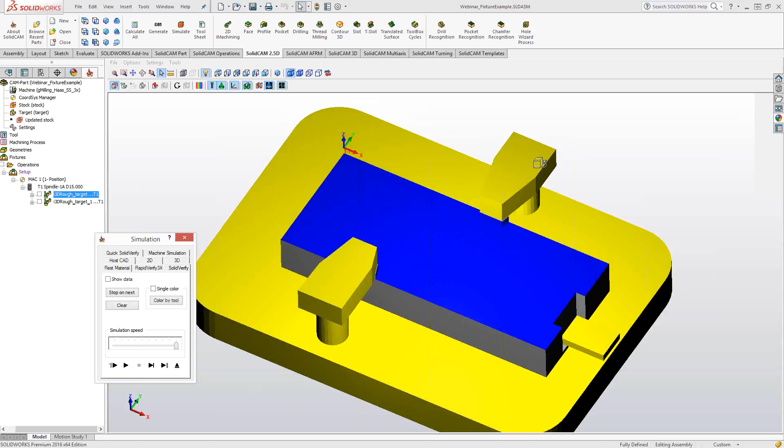I cut the top of the stock because I thought it was neat to see that just doing an iMachining toolpath to the top of the part, you can see it move around the fixture, and of course, most important, you can see that half a millimeter offset. If we go to Host CAD, show the toolpath real quick. So here, once again, nice picture of the toolpath. You can see it moving around the fixture.

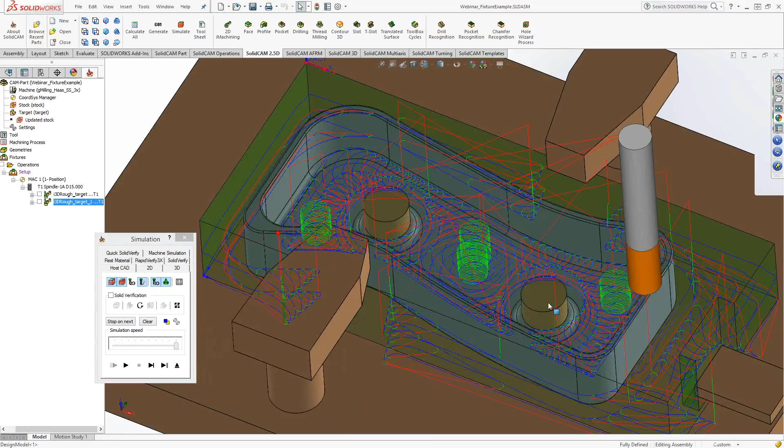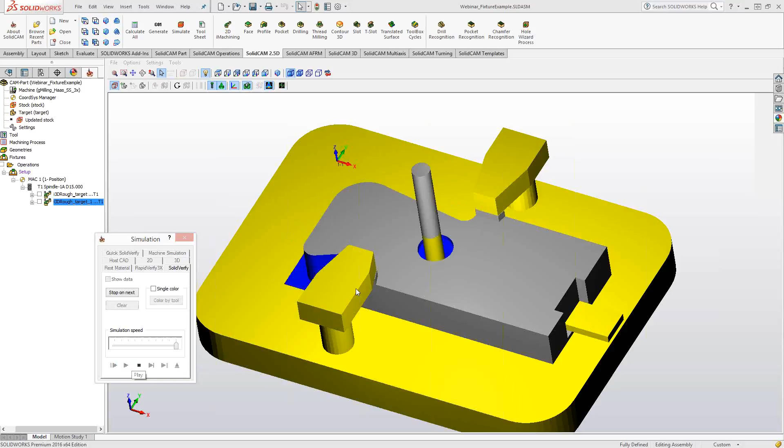And then I have a second iMachining operation just going from the top to the bottom. I'll simulate this in Solid Verify, but you can see we stay away from this fixture. We stay away from the bosses. We know that we can cut over top of this little part of the fixture. So if we go into Solid Verify and play this, you can see the iMachining toolpath properly staying away from the fixture.

And of course, the most important thing here is the fixtures are 3D. They're not 2D. This isn't a working area. It's not like we just take the silhouette profile of each fixture and just don't put toolpath above it. We actually manage the 3D fixture, and the holder moves around it, the tool moves around it. Everything is tracked in 3D.

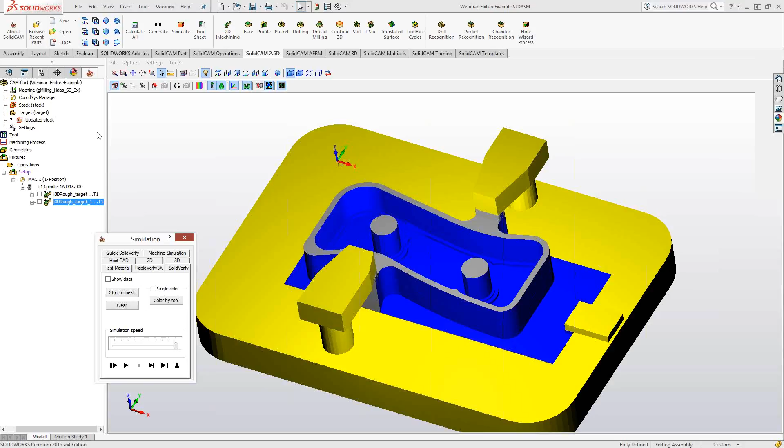So this is my one example, and I have another example which I think you guys will see in the what's new, fixture example 2. This is a nice example Sydney made. So here's just a part, plate, and a common thing, bolt holes, right? Bolt holes to clamp down your part. And if we look at the iMachining toolpath, nothing extra the customer has to do. Define your fixture, click in the operation that you want fixture collision, and then you'll get your toolpath that moves around it. And let me do this in SolidVerify.

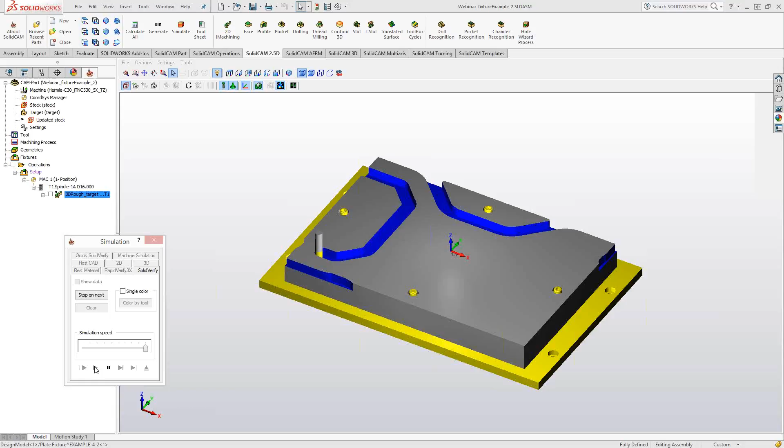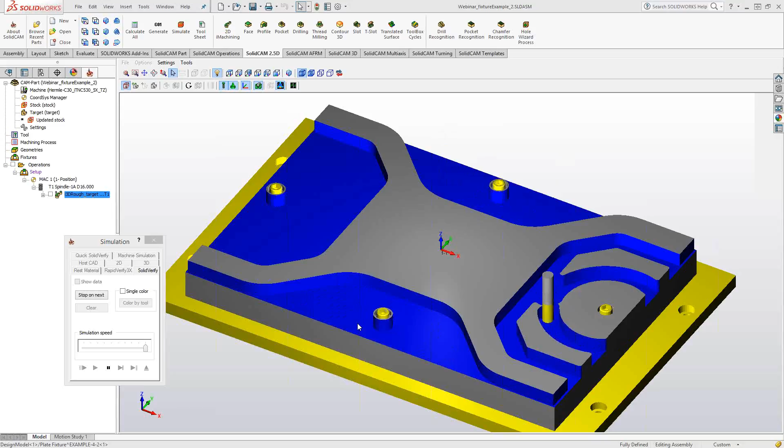And you'll get to see the cool iMachining toolpath. I like this example that Sydney created because you actually get to see some of the channeling that we do, the morphing. And you can see some spirals. You can see here we're actually splitting. We split it here. We get a spiral, we get a spiral. We prepare, we get a spiral. So besides the fact that this is a cool little part for the fixturing, you also get to see some of the smarter toolpath features with separating channels and spirals. And that concludes the what's new.

So, Eddie, I think we can open this up to any questions if there are any. Eddie, are you with us? Yes, Anthony. Thank you very much. We got many questions through the webinar, and part of them we already answered to save time at the end of the webinar. However, we still have questions, and of course, guys, you can continue to ask your questions.

So this is the question, Anthony. Had we had a fillet between wall and floor, to what extent will it complicate the iMachining options? Fantastic question. Okay, so we're talking about a fillet here in between. As of today, you could use the corner radius, and as long as all of your tools have the same corner fillet, SolidCAM will track everything.

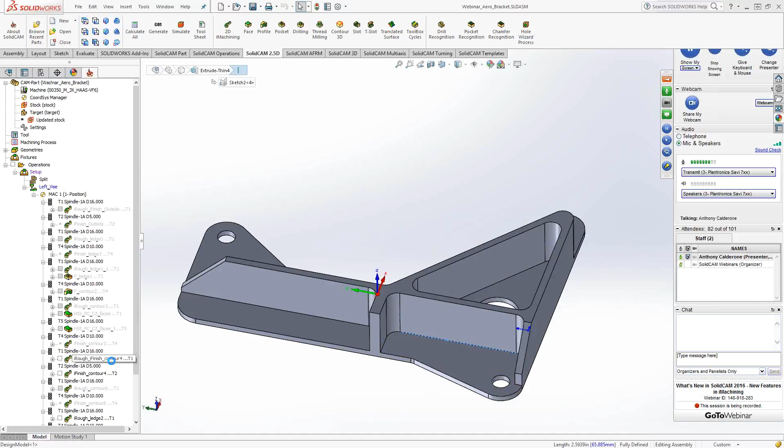But this is a feature we're going to work on for SolidCAM 2017, because this is one of the first things we saw. If you use a corner radius, we will add that corner radius into the geometry page in SolidCAM. So there will be an extra field for the corner radius. And if you are using tools that have sharp corners, or let's say your roughing tool has a corner radius smaller than the corner radius in the part, because for aerospace parts a lot of times there's a 2 or 3 millimeter corner radius, but you might rough with a tool that has a sharp corner, we will manage it automatically.

So the basic answer for today is, if you're doing corner radiuses and all your tools have the same corner radius, it will work. In 2017, we will enhance this functionality so you can tell us the corner radius, and you can use any mixed combination of sharp, smaller corner radius bullnose tools and larger bullnose tools, and we'll properly take care of roughing and moving around the corner radius. So it's a very good question. It was one we had hoped to get for 2016, but we didn't have the time to finish it. But it's high on our list.